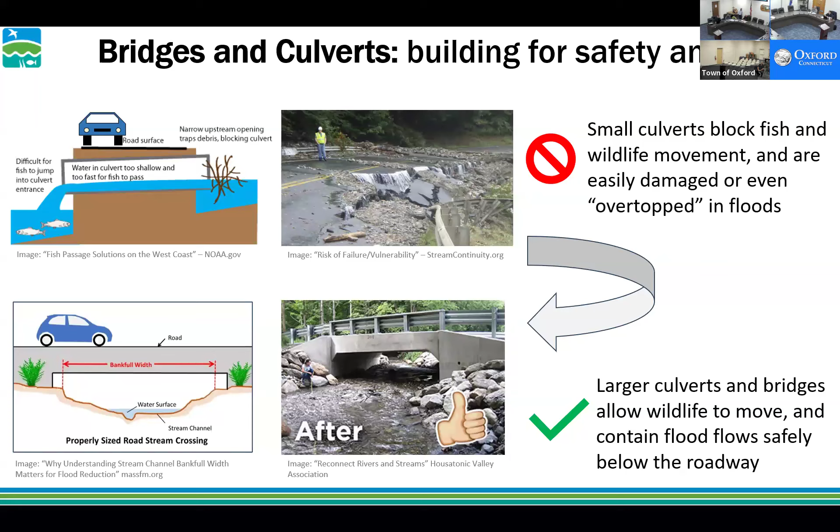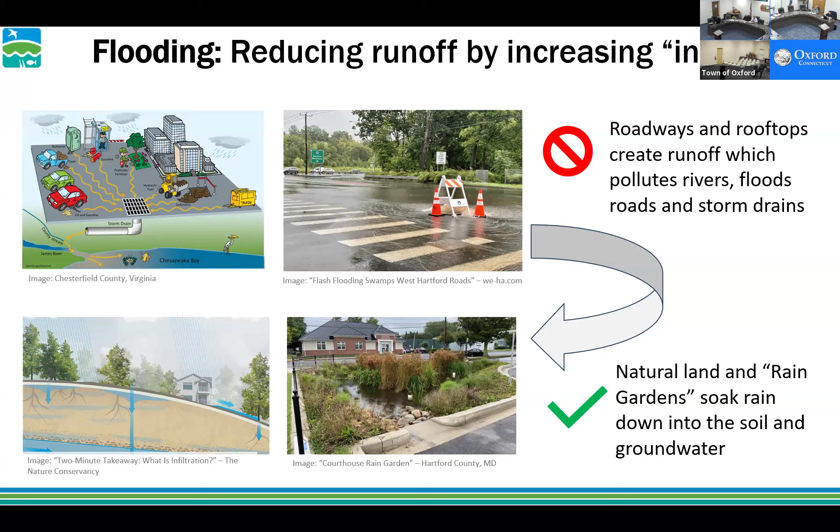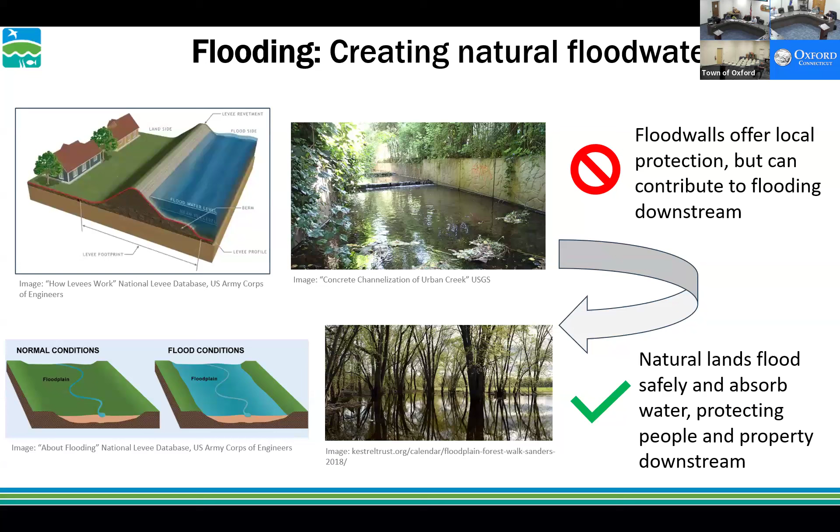And while this may not be directly relevant to the project sites that we're talking about tonight, we do look at opportunities for expanding natural floodplains where they may have been constricted by man-made activities, so flood walls and levees. But again, I don't think that's coming up tonight. So with that, I can pass it to Luchs.

Good evening, everyone. My name is Ron Nault with Luchs Consulting Engineers. We are assisting NVCOG and working with Save the Sound in the elements of providing improved stormwater management through climate resiliency. Tonight's meeting is introductory, part of our listening tour. This meeting is meant to inform the public of the grant and its goals and purpose, hear of any local input, and send us on our way to begin the design of proposed alternatives.

There will be a second follow-up public information meeting once we have had a chance to perform our engineering and environmental tasks, where we'll be back to present the findings and review recommendations from this analysis.

The project is carved into elements where each of the member towns submitted drainage problems, drainage issues in their towns with localized boundaries. Terry Gallagher, an engineer project manager from our office, will go into those in more depth tonight. Naugatuck, Seymour, and Oxford specifically. Talk about the geographic limits, our observations from our initial field investigations, and then seek public input. So with that, Terry's going to begin the review of the Naugatuck project.

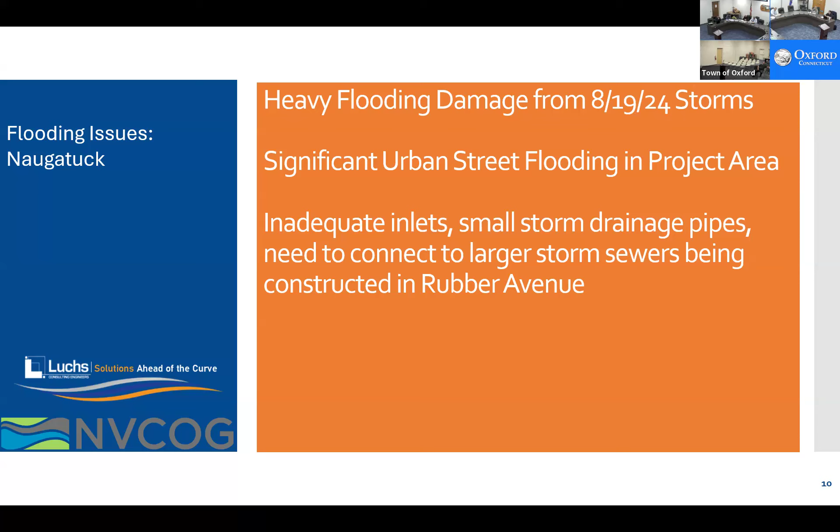So we had met previously with Danielle Goey, the grants administrator, Jim Stewart, the public works director, and other members of the DPW and engineering department staff to go over the areas they felt were the most critical. Next slide, please. The area they selected is between Milldale Avenue from Legion Field over to Fern Street, Fern Lane, down Highland, and over toward Townsend Avenue, where they have done some previous storm drainage.

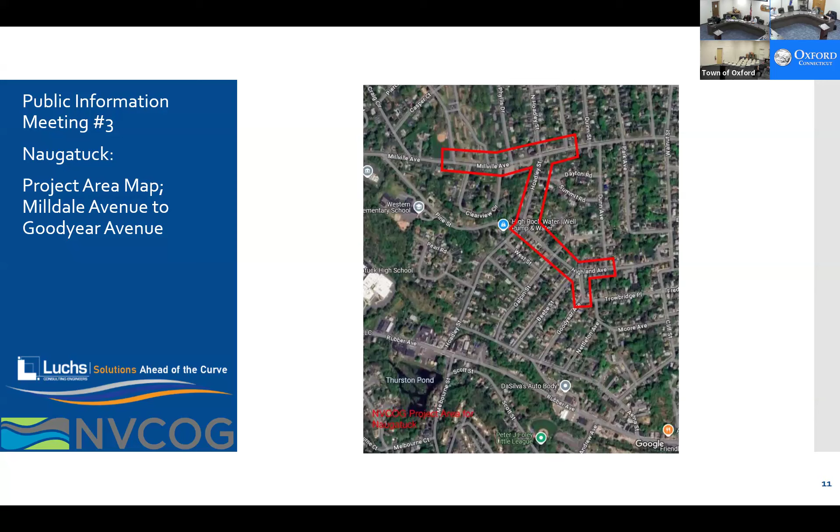The borough is in the process of installing new storm drainage, large storm drainage in Rubber Avenue as part of a project this summer when the flood hit on August 19th and caused a lot of damage in Naugatuck. Also caused a lot of damage in Oxford and Seymour. I think this area is the epicenter for most of the flood damage in the state. Really highlighted that, if you go to the next slide, please.

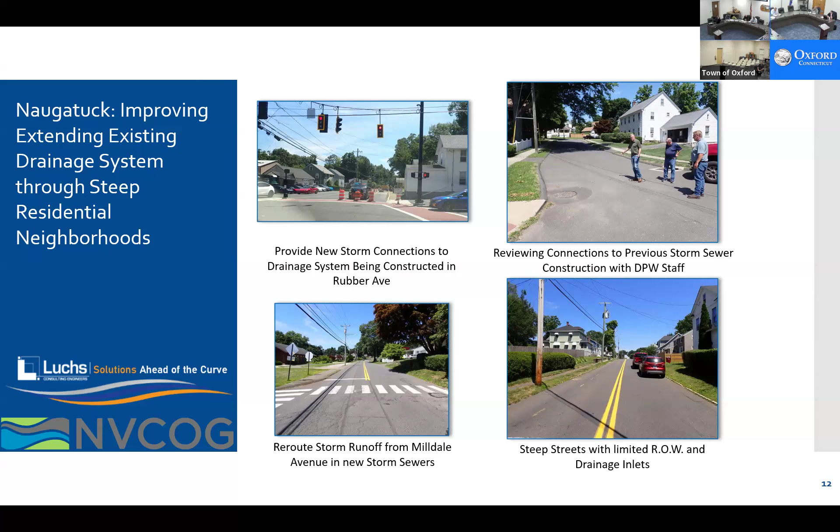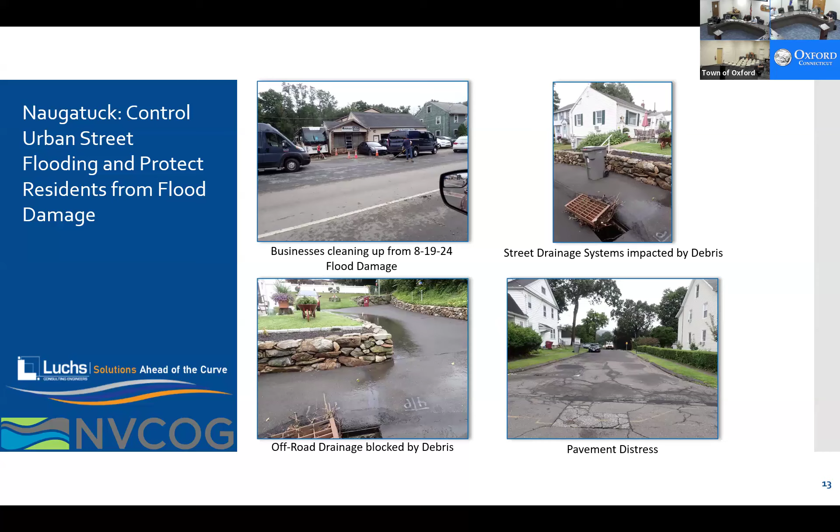That being said, it's a collection of where people are seeing the most flooding in their neighborhoods and where they feel there's places that could be corrected to help lessen damage to private properties and public infrastructure. So if anyone from Naugatuck is here, we're here to listen to you tonight. Anybody else on? Members of the public out there, if they have questions on Naugatuck.

They're interested in Oxford. I don't know what they're interested in, but they don't seem to have any questions on Naugatuck, so I'm presuming they're Oxford. Herman or Mike, can you hear us okay? Online? Please feel free to unmute yourselves if you have questions. Okay, great, they can hear us, so I guess they're not here for Naugatuck. We have all the maps for Naugatuck with us. If anybody comes in later on, we're here and can answer any questions later on in the presentation.

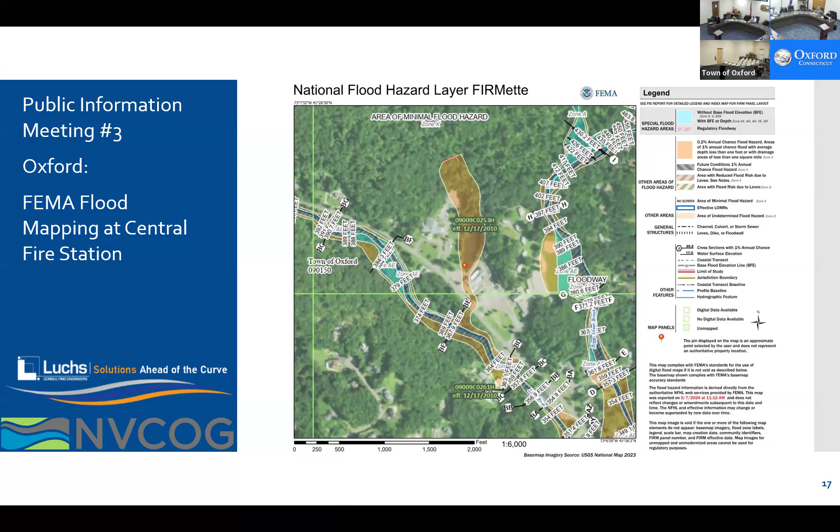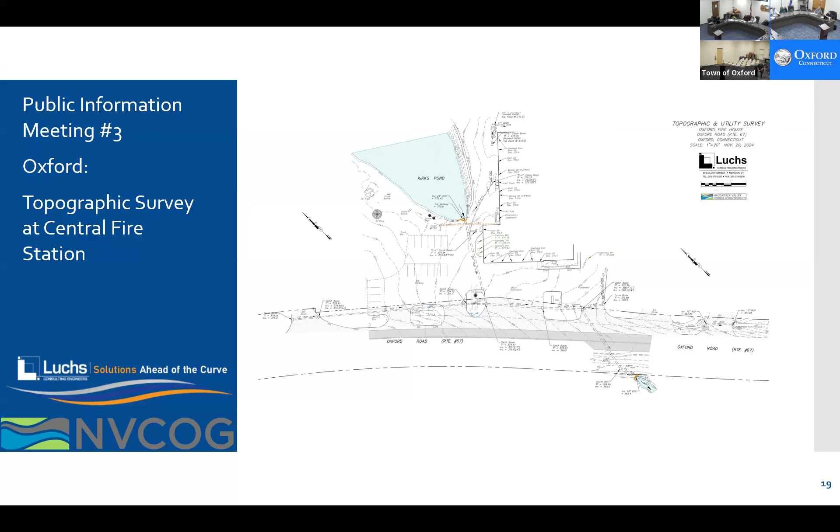So we have been out doing surveying. We've been using some of the town's record maps of the facility, but some of those are older. So we've located the firehouse, the first floor, all the doors, the equipment pad elevations, the doors and windows going into the ambulance facility in the back. And we've mapped the storm drainage coming out the front parking lot, a portion of Route 67, and the drains going across the street. We've also mapped the drainage going down Route 67 where the town is planning their sidewalk improvements and where they've done repairs due to the flood damage. And we have those as larger scale maps in the back of the room if anybody wants to look at those in detail.

So basically what we're looking at here is there's undersized pipes. We're going to look to see if there's an opportunity to decouple the pond drainage from the drainage in front of the firehouse. We may look at opportunities to have a new culvert going across the street toward the Little River to divert runoff around the firehouse.

And we're going to try and look at ways to reduce damage to emergency services facilities, which are a critical need for the community when they're responding to flooding elsewhere in town. You don't want to have your ambulance facility or your central firehouse out of commission during a large storm event. So that's where we are right now with the project, and we're here to take public input.

There we go. Well, I don't know if the Oxford folks want to say anything about the flooding here, or just want to go straight to public.

Excuse me, this is Herman Schuler. Is this going to be covered under the FEMA reimbursement? Hi, Herman. Yeah, I'm sorry, we're having a little trouble hearing you. You asked if this will be covered under FEMA reimbursement? Yes. No, so this is not associated with the August 18th storm. This is a long-term project that was identified a while ago in a natural hazard mitigation plan, and it's being funded through a climate resilience fund. I should say the design work of it is being funded by a climate resilience fund grant from the state.

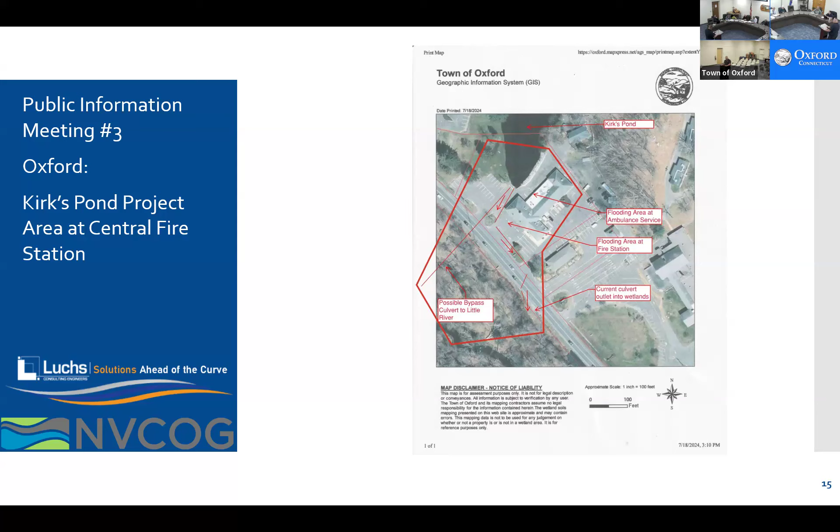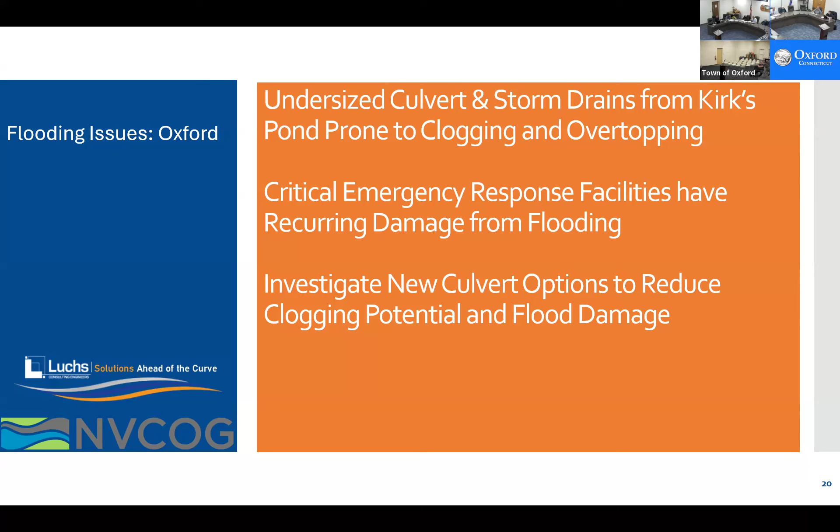Christine, just in general, not only this project, but all of the 9 projects, we will be looking in the watershed to see if there's opportunities for upstream detention or flow reduction, recognizing Paul's view that here at this location perhaps not, and also water quality improvements too. Water quality doesn't seem to be the issue so much here as it is for Naugatuck or Waterbury, like we talked about last night.

So this has me thinking though, where do these parking lots drain to in this building? Do we know that? They drain into the pond. They drain directly to the pond? Well, no, they go through woods and then they gradually get down to the pond. Sheet overland flow. Yeah, I assume it's sheet flow. I haven't checked to see if there's a pipe off the back of the parking lot or anything like that. Okay, that's what I was gonna suggest. If we knew there was drainage going from these parking lots right into the pond, then it would make sense to direct it the other way. But you're saying it's already going that way. Okay, all right.

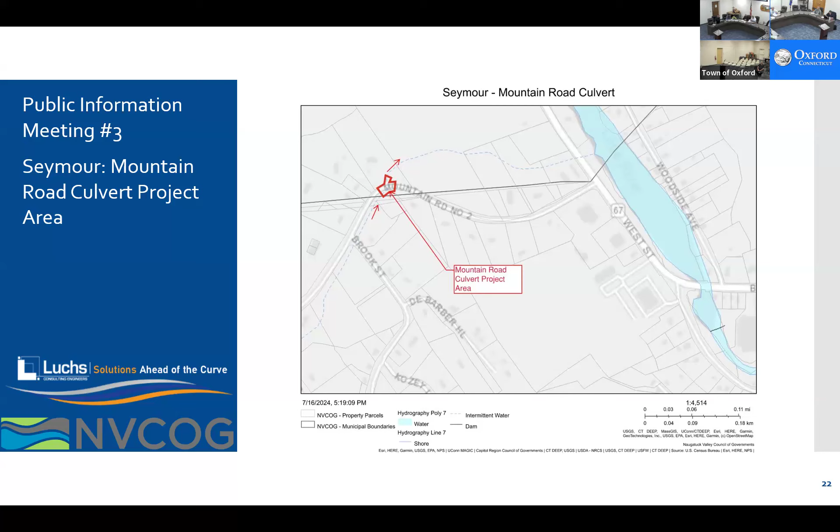This stream, it's a small stream. It's a mapped FEMA floodplain. They mapped it by approximate methods saying it floods in a 500-year storm. But what's happening is it's flooding whenever there's one of these high intensity, short duration storms too. So it's a recurring flooding problem. The culvert itself is right along the town line with Oxford. The culvert is actually in Oxford, but Seymour takes care of Mountain Road. They do all the maintenance. So Seymour is handling this as part of their project. Next slide, please.

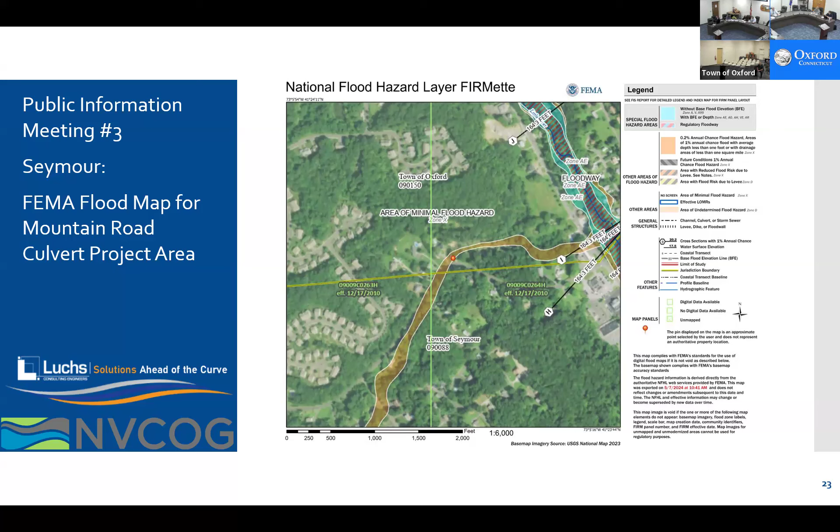Next slide, please. It also has sanitary sewer and some other utilities through there. So we're getting elevations of the sanitary sewer to use for design of the new culvert. The channel upstream, as I said, is actually pretty nice going upstream. The wooded channel, and Save the Sound has been out looking at that. We are also going to look at some little detention areas upstream in the watershed to see if there's anything we can do to reduce runoff going to Seymour and Oxford. And there's a nice natural stream further downstream below the culvert where maybe there are some things that can be done to help improve the quality of the stream.

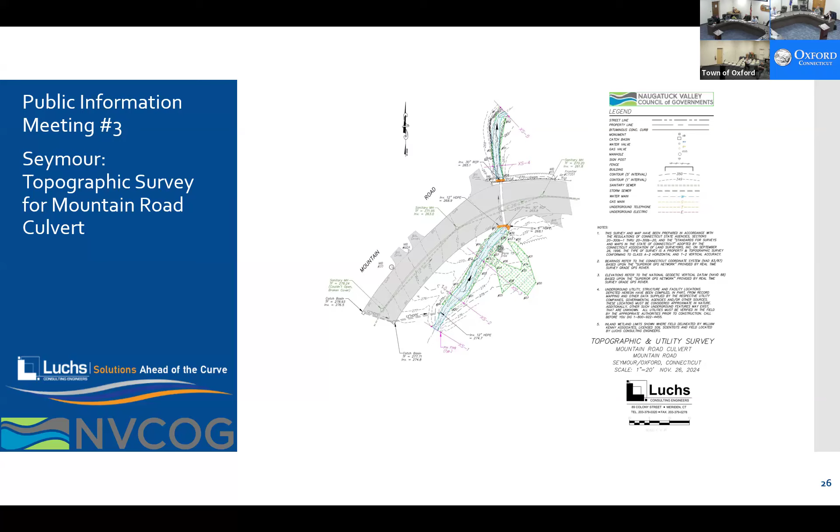Next slide, please. And that's just the progress topo that we have of the culvert and the stream, and we've had wetlands flagged along that area. So we've got some surveying done, we're getting utilities in, and we have to add some right-of-way mapping, but we're moving forward after we hear from the public what comments they have on the Seymour project. Next slide, please.

And so our goal there would be to upgrade the culvert capacity, get something that works with the surrounding infrastructure and properties, and hopefully improve the stream capability. I don't know if Paul, you want to say anything about the stream and the Seymour side?

I can. I know we have one of the local landowners who just entered the room, so I don't want to cut them off, and if you do have any comments to make, just come up to the podium. You just entered. Yeah, that's fine. So yeah, we're ahead of schedule a little bit. He just went through some of the basics of it.

The thing that I will say is that, yes, it is sort of a naturalized stream. The landowner who's here actually informed us that the stream had taken a much different course. It has been straightened when Mountain Road was built, and it took a more natural bend through the front yard of the house that's right on the outer bend of the road there. So it's a 30-inch RCP, but it's a 23-foot wide channel. So that right there just turns into nothing but problems. And the landowner's been removing material from it, and so is the town.

We would be looking to create a stream crossing structure that is a little bit wider than 23 feet. That may not be possible in all that space, but that's where Save the Sound would be looking to, sort of our starting point. And it is a steep stream, so it's really a lot of boulder material and actually what appears to be some bedrock downstream of the crossing there. So we would be recreating some kind of boulder bedrock type steps through the stream crossing if we can go with an open bottom structure.

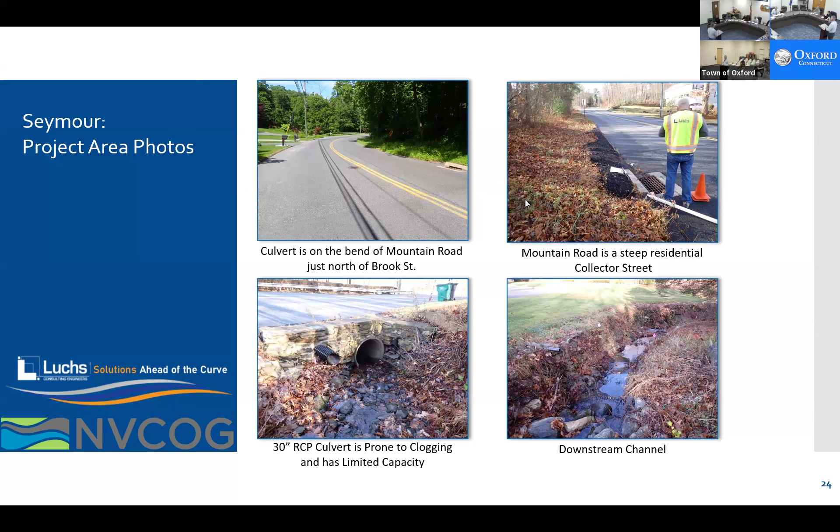Well, what we're gonna do is we're gonna update. We actually have a survey map, a progress survey map, on the table in the back. We can discuss it afterwards, but we're gonna update our surveys for adding the underground utilities and other things that we located at the surface. We had some questions to give to the town. They're gonna look that up.

We're gonna check the watershed. We're gonna do hydrology and hydraulic calcs for a couple different options, and probably later this winter we'll have some of that for the town to review and reach out to you at that time. And we mentioned at the earlier part of the meeting that this is meeting number one. There'll be a follow-up public meeting where we'll be presenting recommendations. So you'll see that just as you were noticed for this meeting. So keep your eye out, but we'll be back with concrete ideas for solutions.

It's probably going to be 2 to 3 months. I guess it depends how we do it with NVCOG. We're sort of trying to do these towns in batches. And as it worked out, because Oxford, Seymour, and Naugatuck got hit the worst with the flooding, two of those towns are in our first batch, so we're trying to get those started. So we'll probably have results on those sooner than on some of the other towns. It may be 2 months, something like that.

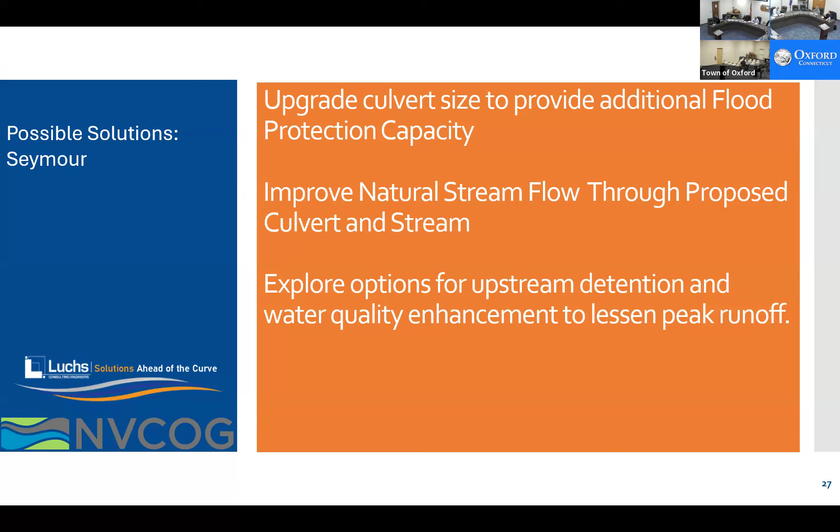And I do believe that concludes our comments. We heard from Mike, who said he was all set, and I think that wraps it up. So unless anyone has any last words, I think we're all set. That concludes our first set of public meetings. And as we mentioned before, we'll be coming back to you hopefully in a few months.